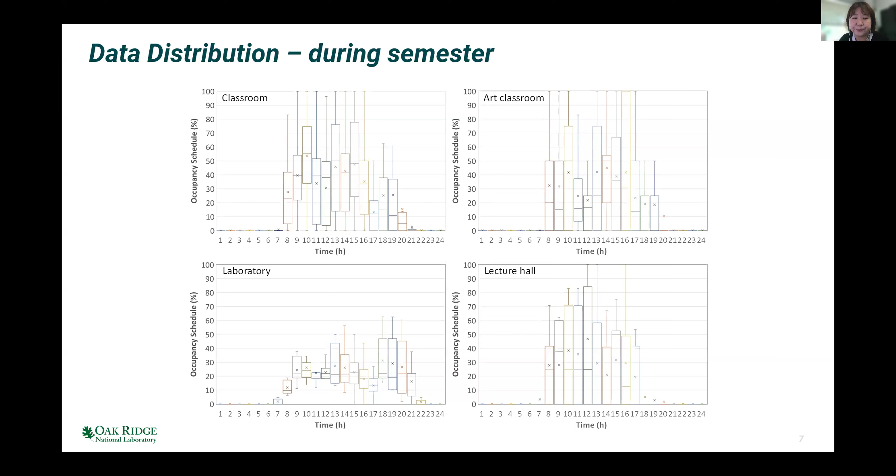Based on all of this data, we generate the occupancy schedule and compare the updated schedule with the previous ones, including the semester schedule and the summer vacation schedule. As you can see, there are significant differences between the updated and previous schedules, especially for classrooms, labs, and art studios. These spaces are not continuously used throughout the day, and occupancy tends to drop sharply during lunch and dinner hours, like the office buildings.

During the semester, the updated classroom schedule shows that fewer than around 50% of the classrooms are occupied at any given time. This is because college classes don't all run at the same time, unlike K-12 schools where schedules are more uniform. In the summer session, usage drops even more. For example, classrooms on the top left are only about 15 to 20% occupied between 8 a.m. to 2 p.m. and below 5% from 3 to 8 p.m.

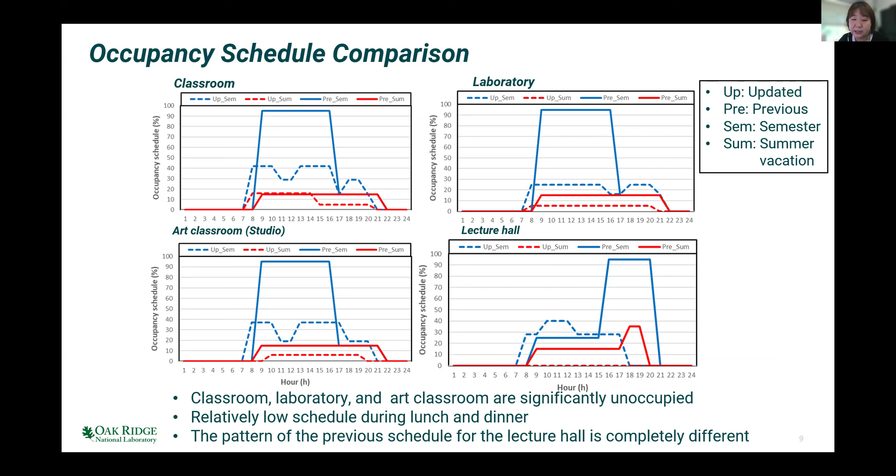As mentioned earlier, the occupancy density in OpenStudio prototype models, including college buildings, was defined based on ASHRAE Standard 62.1. On the left side in this table, you can see the occupancy density values per space type. Classroom and lecture hall have the highest density, around 699 people per 1,000 square meters, whilst spaces like offices or lounges have much lower densities.

On the right side, you can see the differences in occupancy schedules. Previously, only 3 occupancy schedules covered the whole prototype college building model, and only 1 schedule covered all teaching spaces. But in our updated model, based on our collected data, we used 7 occupancy schedules, including updated occupancy schedules of the classroom, laboratory, art classroom, and lecture hall. This allows us to better reflect the distinct usage pattern of each space based on actual reservation data, instead of assuming that all instructional areas operate the same way.

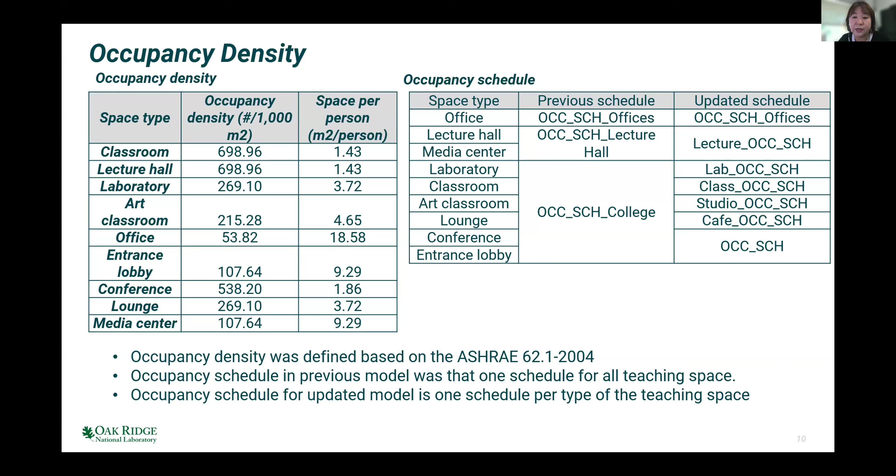This slide shows our comparison of the average number of people in each space type based on the updated versus previous occupancy schedules. As shown on the left side, we see a significant decrease in average occupancy after applying the updated schedules. For example, laboratories decrease around 65%, and art classroom and lecture hall decrease by 40 to 50%. These reductions vary by space type, reflecting more realistic usage patterns captured from actual reservation data.

Because the number of occupants has decreased, the required mechanical ventilation rate also dropped, shown on the right side. In particular, the lecture hall saw the largest changes, with ventilation rates decreased by about 25% to 32%, depending on the version of ASHRAE 90.1. These results suggest that using updated occupancy schedules can lead to more accurate energy modeling.

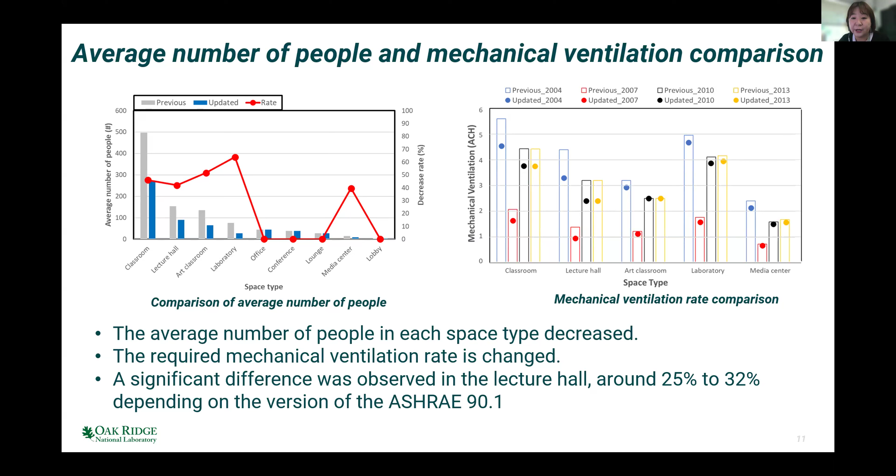To wrap up, the main goal of this study was to develop a more accurate occupancy schedule for the OpenStudio prototype college building based on actual space reservation data collected from US universities. And our research results show that using a generic schedule like those from commercial or school building models tends to oversimplify how space is actually used in colleges. And this can limit the accuracy of simulation or energy modeling.

So as a next step, we plan to expand the data set by collecting more class reservation information from a broader range of universities across the US. And of course, this work was developed specifically for the OpenStudio prototype model, so the current scope is somewhat limited, and further studies will be needed to generalize the findings across different modeling frameworks or building types.

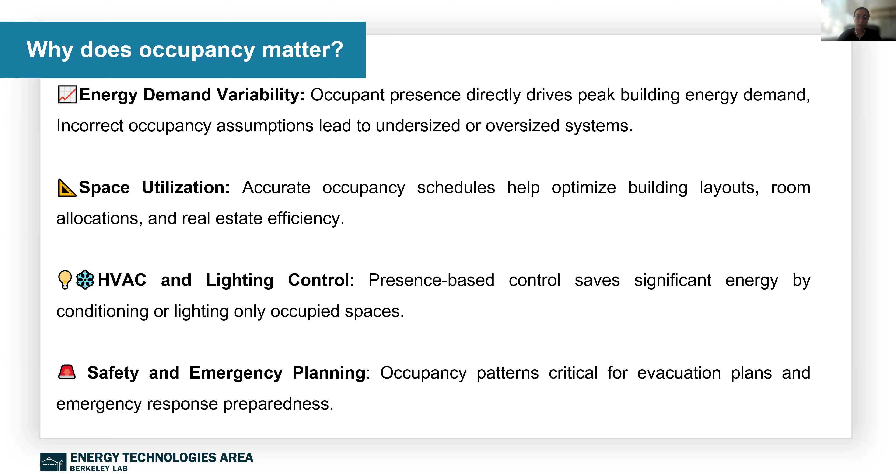Next, I'll come to the different approaches to model occupancy. We know there are several ways we input occupant information, occupant presence, into our building energy models. The simplest and most straightforward way is using a fixed average occupancy. Say we assume that there are 3 people in a household and they are present 24/7 in a home. This is the simplest that we can do. However, with each different use case and objective, we would need different kinds of occupancy modeling approaches.

The second one is schedule-based, which the previous presenter was mentioning, where there are occupant schedules for daily, weekly, and the patterns are predictable, and it's more deterministic. It could be hourly, 15 minutes, and so on. And then the next level is stochastic, which is probabilistic, where we have some variability within the occupant presence, and it's based on statistical distributions, generally Markov chain models or random variability.

And lastly, a higher level of detail, is agent-based or dynamic probabilistic modeling, where we basically model each and every occupant. Each occupant is assumed to be an agent, and they dynamically respond to the environment and other agents around them. This is more like real-time or adaptive occupancy.

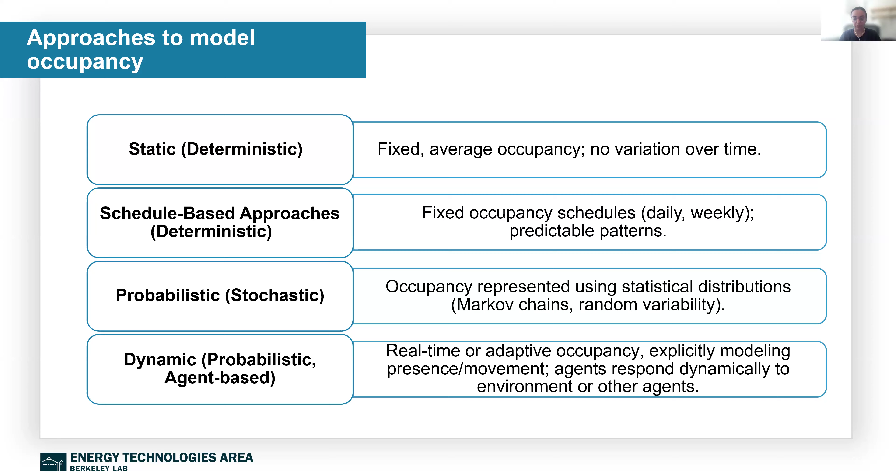So once we have those models, how do these different modeling approaches actually matter within our building energy modeling simulations? Here is a quick example of how deterministic versus stochastic occupant schedules within an office building impact the efficacy of different energy conservation measures. We used a DOE prototype office model, and for the baseline, we used a fixed occupancy. For the second one, we used a stochastic occupant schedule for offices. And for the third one, we simply used the DOE prototype model schedule.

When we simulated these different occupancy approaches and applied some energy conservation measures to the baseline model, we found that just because we were using different types of occupancy assumptions, with the overall occupancy still being the same, there were significant differences in the energy saving potential of different measures. This is for the case of Chicago, but overall we estimated it for 5 different climate zones, and we found that with stochastic schedules the potential of energy conservation measures was in the range of 25 to 41%.

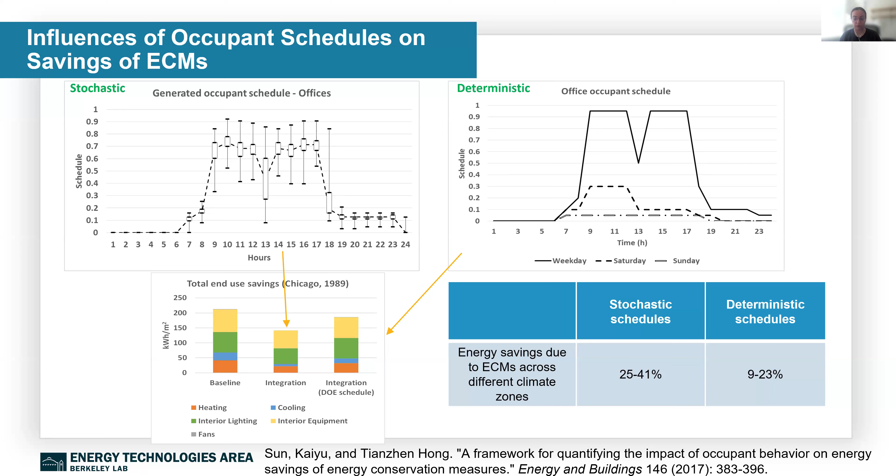So now I come to this concept of level of detail. This level of detail concept is very similar to what we already have in the building information modeling industry, or in the urban scale CityGML approaches of level of detail. However, here what we're trying to achieve is to say that this level of detail concept is broadly applicable for occupant modeling, and occupancy is a part of it, which I'll come to in the next slide.

Level of detail is essentially the degree of detail or granularity used to represent complex human behavior. Human behavior would have elements such as occupant presence and movement, their interactions, how they negotiate, or even simply how they make judgments or decisions. So there are plenty of behavioral aspects that this level of detail concept entails.

And what we say here is that this level of detail is an important concept and framework to help us assess at what level should we be modeling occupants. So for occupancy related level of detail, we could have 3 different dimensions.

The first one is modeling formalism, which I mentioned in the previous slide. The second one is at what spatial scale - is it zone level, building level, or city scale? And then the temporal scale - at what temporal scale do we want to input this occupancy?

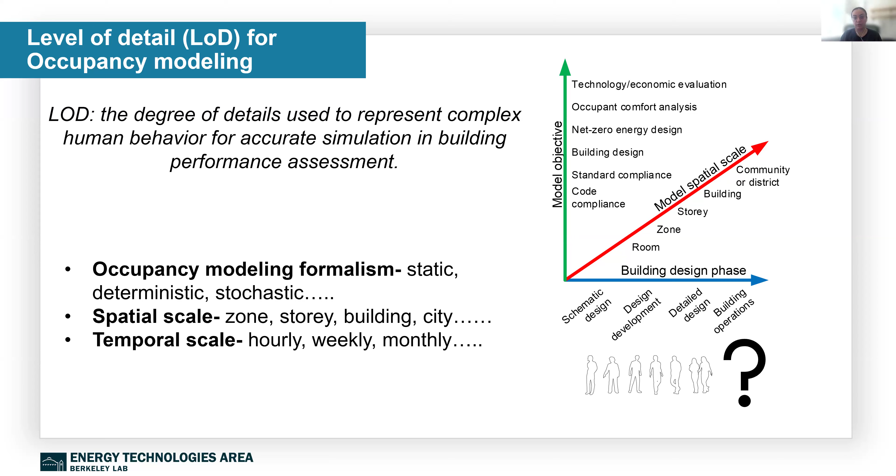I'll come to all these details and nuances in a bit, but before that, I'll introduce this level of detail framework for broader occupant modeling. This framework we developed as part of Annex 79, International Energy Agency's project, where over hundreds of researchers came together to understand how different occupant modeling approaches, case studies, and techniques can be improved. This was part of that project.

Here we have 10 different aspects of occupant modeling. The first 5 are related to model structure, and occupancy is one of them. The next 5 are more related to behavior, like how occupants sense, predict, learn, and others. All these different tiles are actually different levels of detail that we could go into for modeling each of the occupant aspects. For occupancy, these tiles are very similar to what I presented earlier - the static, deterministic, probabilistic, and the agent-based dynamic probabilistic approaches.

And here we say that static is considered LOD0, while the most granular is considered LOD3, the agent-based model. How do we decide upon this? It's basically related to 4 characteristics: what are we trying to achieve in our model, through what performance indicators, at what spatial scale, and what is the building type that we are considering.

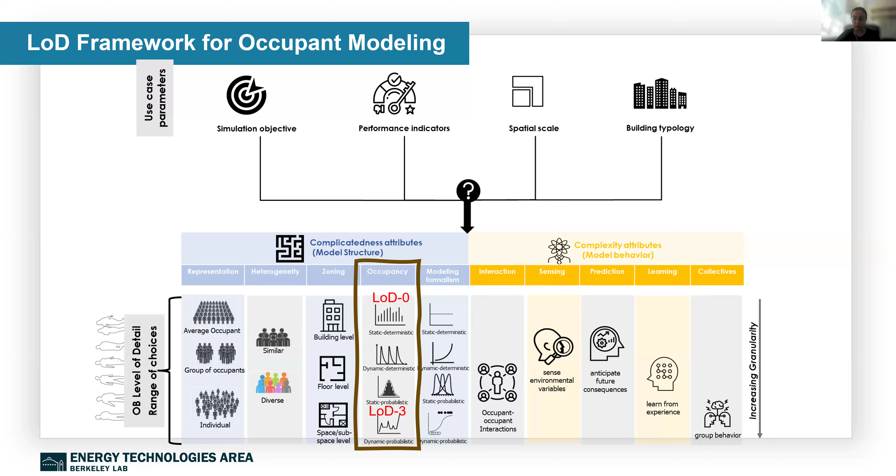For example, if our objective is simply an early design stage analysis, maybe a lower level LOD would be good for comparison. However, if we have a detailed occupant impact analysis, we should have some medium level LOD2 or LOD3 kind of analysis. These levels of detail are only indicative, and they are not comprehensive enough. We could have levels LOD1 to LOD9, depending on what kind of granularity and combinations we want for the different occupancy dimensions related to spatial scale, modeling formalism, or temporal scale.

Then for performance indicators, again, if we are looking at high level performance indicators like annual energy use or energy star score, maybe a coarser LOD would be feasible. While if we are looking at detailed occupant level performance indicators, we would want occupancy that reflects or can connect to those performance indicators, like partial occupancy criteria or occupant hour criteria.

Similarly, for spatial scale, if we are looking at, say, zone level HVAC controls or lighting controls, we would definitely want the occupancy to match at that spatial level instead of modeling occupancy at a building level while doing the analysis at the zone level.

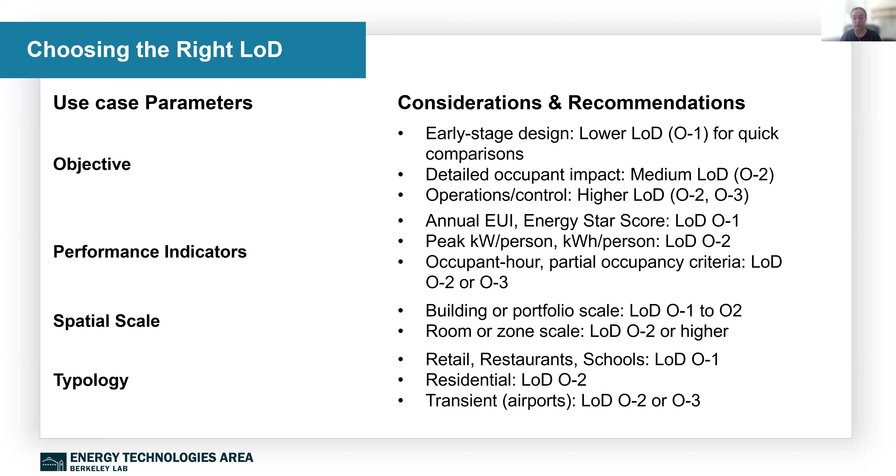Then the next aspect is, how do we model occupancy or occupant behavior in general? We have different energy modeling tools, but do we have enough suite of simulation tools to model those occupant behavior or occupancy? We have this suite of modeling and simulation tools that we've developed at the Berkeley Lab for the past more than a decade.

While some of them are specifically for occupancy, the others are broader for occupant behavior. For example, this drivers, needs, actions, systems - this is just an ontology that represents occupant behavior. And then this ontology paves way for an OBXML schema, which is a standardized XML schema similar to what we have in the BIM for GBXML. And it is

used to represent occupant models. These occupant models could be anything ranging from occupancy models to window opening models to thermostat behavior, anything. And then the fourth one, the occupancy simulator, is specifically an occupancy related tool which is focused on office occupant behavior, office occupancy modeling, where we have this web-based app.

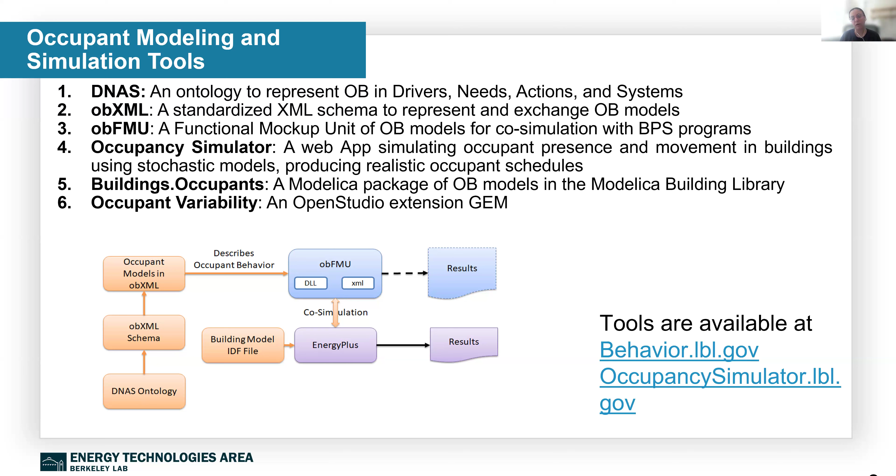You can go to occupancysimulator.lbl.gov and then input some of the parameters that you want for your office building, and it would generate you a realistic occupant schedule using stochastic Markov chain modeling that you could feed to your Energy Plus or other engine building energy model. And then there are also broader models like buildings.occupants, which is a Modelica package, and an OpenStudio gem, which is occupant variability, which has some parts of occupancy, but broader occupant behavior.

And this is just a snapshot of what you could expect in the occupancy simulator, which is hosted at the LBL website. It has a Markov chain process and can give you zone level randomized occupancy for office buildings, which outputs that you feed into the model.

And this has been actually used for a variety of cases within the building performance simulation community. It's been used also by the PNNL Lighting Group, DOE's Hardware in the Loop projects, ARPA-E sensor projects, and obviously the Annex 79 community.

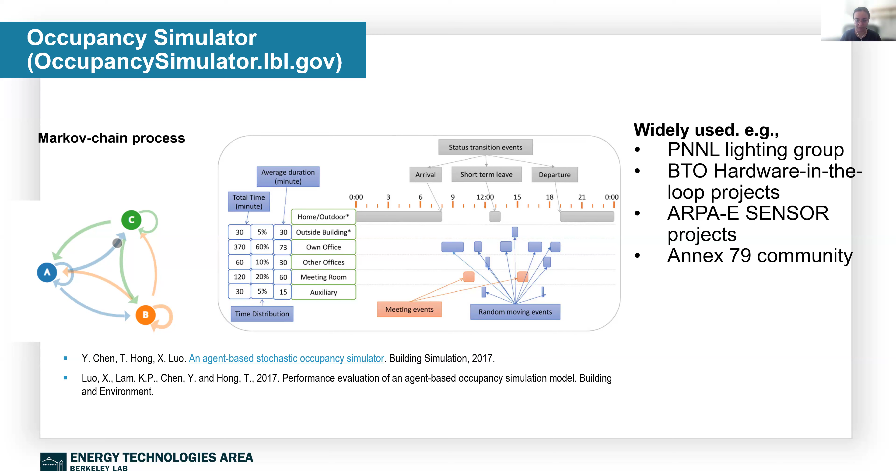So in summary, I would say that no occupancy model or even occupant behavior model is actually perfect. And real-world occupancy patterns are inherently complex and variable, but we have to make sure that our model presents the most realistic or the most accurate occupant assumptions that match our objective or intended purpose. And also this selection of this level of detail is also influenced heavily by what kind of data is available, or what are the computational resources or time or effort that is needed or available for the model development.

And lastly, I'd say that we should follow a parsimonious modeling approach so that we can find a compromise between the data available, different levels of detail, and the computational time, so as to select the most relevant and adequate occupant or occupancy modeling detail. This also requires a lot of judgment, and particularly for new energy modelers or who are not as experienced, they might find it difficult to navigate to what should be the judgment.

I would like to navigate to the ASHRAE Standard 209, which also has a similar level of detail appendix in the recent code cycle for broader modeling. And that could be also a good resource to start with. And yeah, I think this is all I have. Thank you.

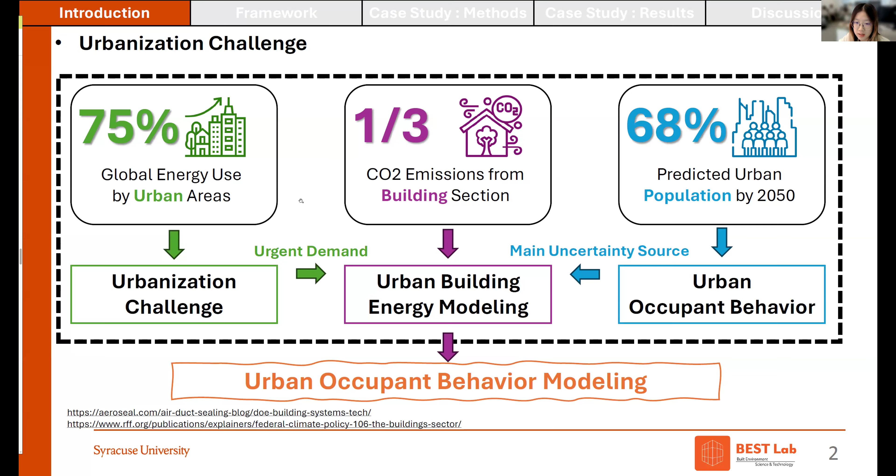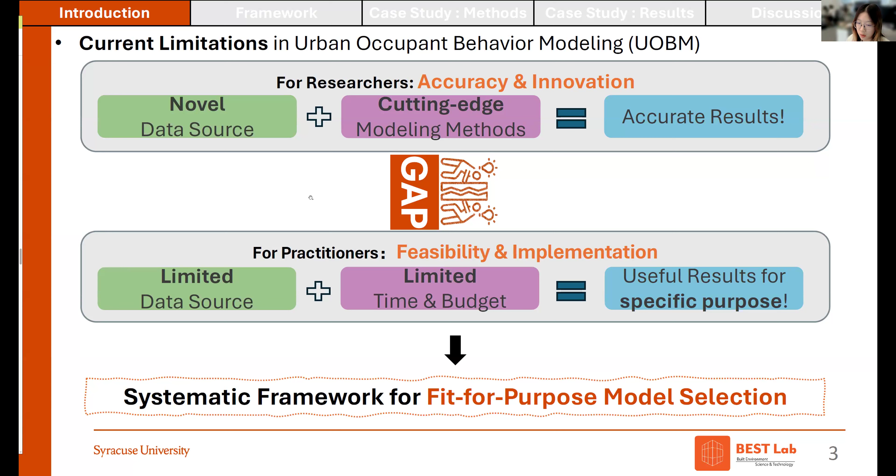So here comes our framework. This framework is mainly built on two main concepts. The first one is, as Jeetika mentioned, the level of detail concept, and the second one is space-based and person-based. The first one, this level of detail, has been introduced, right?

It's introduced by Jeetika to the occupancy behavior field. It can show different representations of objects at various resolutions. And the second one is to show the space-based and person-based approach to distinguish the modeling strategies for different building occupancy modeling. And here comes our three core concepts for our framework.

First is representation, which means what units each model represents, like from average buildings, groups of buildings, individual buildings, to groups of occupants and individual occupants. The second one is heterogeneity, which is the variation in occupant characteristics - maybe the occupants can have similar behaviors or diverse behaviors.

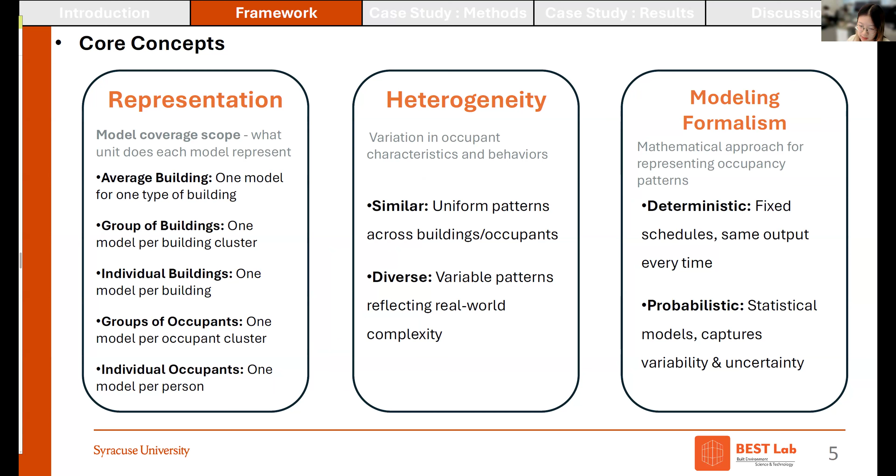And the last one is about modeling formalism - whether it's deterministic fixed schedules or probabilistic statistical models. And according to this, we create our framework with 6 different levels.

The space-based scale is mainly focused on the building. It's space-based - we generate schedules from the building side, like standard deterministic schedules from some standards. S1 means deterministic schedule derived from measured data, like the first presenter did. S2 is probabilistic modeling across building groups. S3 is probabilistic modeling for individual buildings.

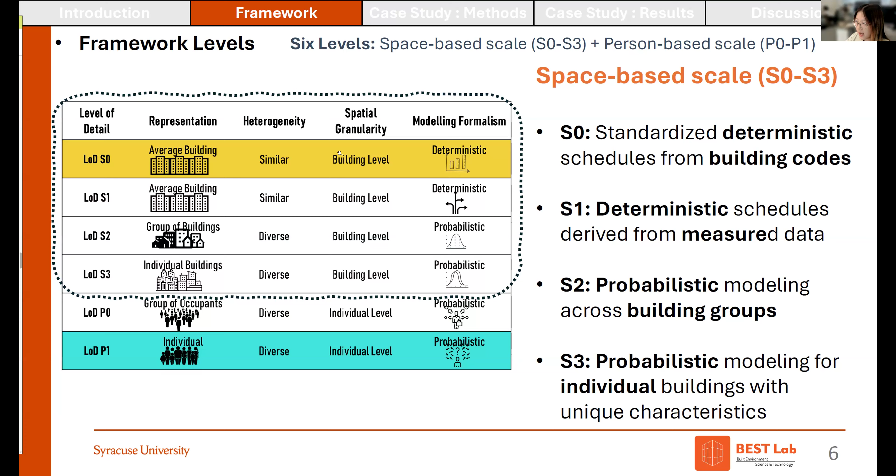And here comes the person-based schedules. This is meaning from human mobility - data is generated from the perspective of the persons. We just model different human behaviors from the person side.

And we can easily do the mapping - we can easily map the data source and modeling methods according to our definitions. Like we have individual level data, and it's surely for the individual level of detail. We can have building level data, which is surely for the space-based LOD.

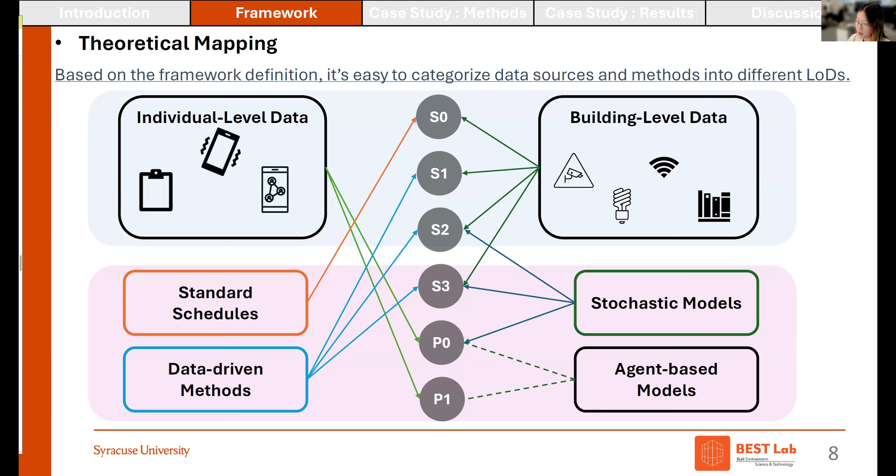But here comes the big question: when we really use it, the same data source can have different levels of detail. The actual LOD depends really on the data coverage and partitioning methods. Even if we have GPS data, for example, covering only about 20% of the population, it has limited representativeness, so it can only be shown as LOD 0. But if we have GPS data covering all the population, it can be shown as LOD 1. So LOD level is not just about data type - it should be data type, coverage, and model method, the combination of both.

So how can we map the different application scenarios to the LODs? Because for the resource constraints and implementation trade-offs and dynamic mappings, we have different choices for different application scenarios. We have to find a way to map this. So we have the two-stage application scenario mapping.

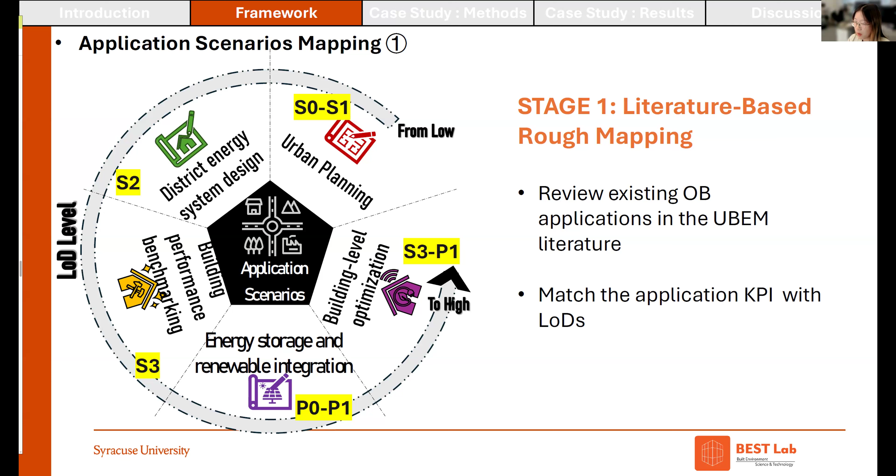The first stage is literature based. We read a lot of papers and found out how people use the different building occupancy modeling methods in different applications. It's a very raw mapping. We can see that for urban planning, we can use S0 or S1, district energy system design or building performance benchmarking, energy storage, renewable integration, building level optimizations. Each of them can use many of the LOD levels, but we want to quantify it. We want to show something real.

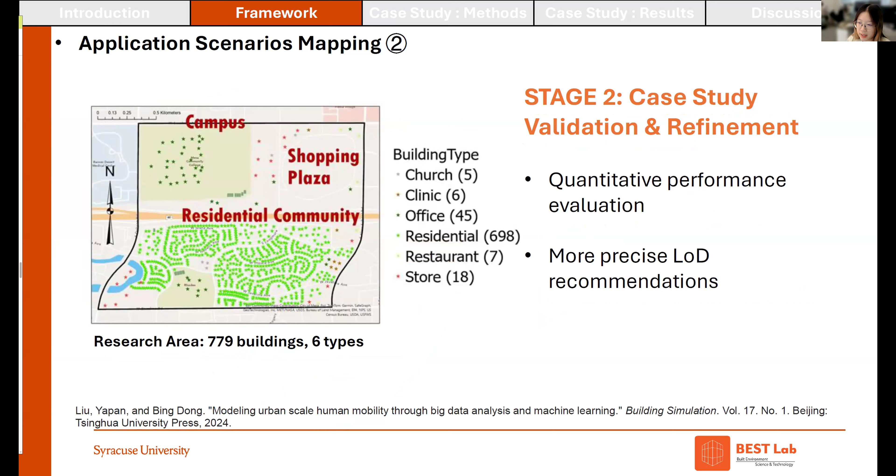So we design a case study to validate our framework. We select a Phoenix neighborhood with about 800 buildings. It includes residential buildings, office buildings, stores, restaurants, clinics, and churches. This diversity lets us test the framework across building types. And our method has 6 steps.

The first step is to generate GPS data which can cover all the population. Because we only have the GPS data, which is 1 month of hourly stay points, containing about 2,000 users in this research area. It just contains about 20% of the population. So we want to use this data to generate something like the ground truth data for this area. So we use the LSTM to do that.

After that, we use the generated real data to do the sampling to get the 2% survey data. And after that, we get the human mobility data. It's human-based. We just know when people will arrive somewhere, maybe they'll leave somewhere. So we use spatial joins to transfer the human mobility data, to transfer their movements to building occupancy schedules.

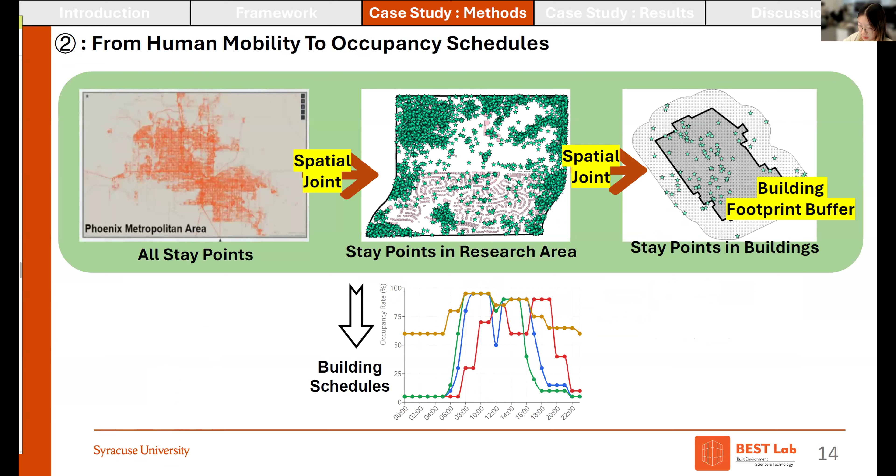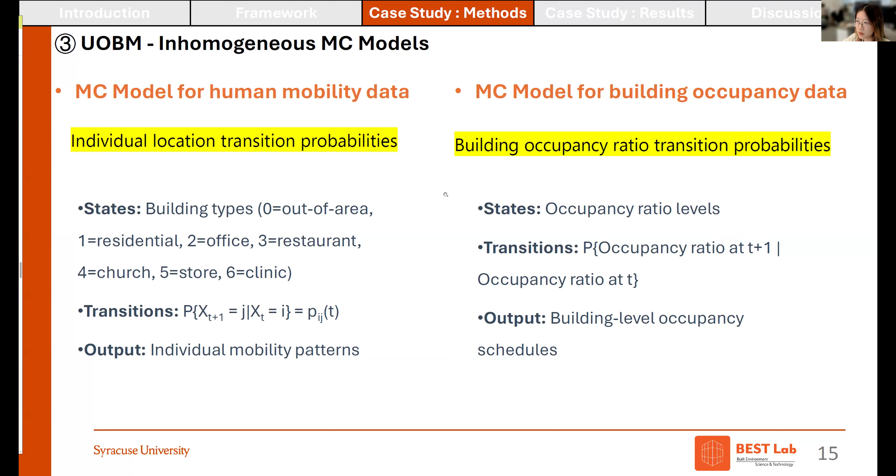And the second part is how we model it. We now have the different data types, right? We want to use them to do the modeling. So we use one method, the inhomogeneous Markov chain model, but for different data. For human mobility data, we use it to calculate the transition probabilities between different locations. And for the building occupancies, we use it to calculate the probability between building occupancy ratios. So by this, we can generate 6 LOD schedule versions for different types of LODs.

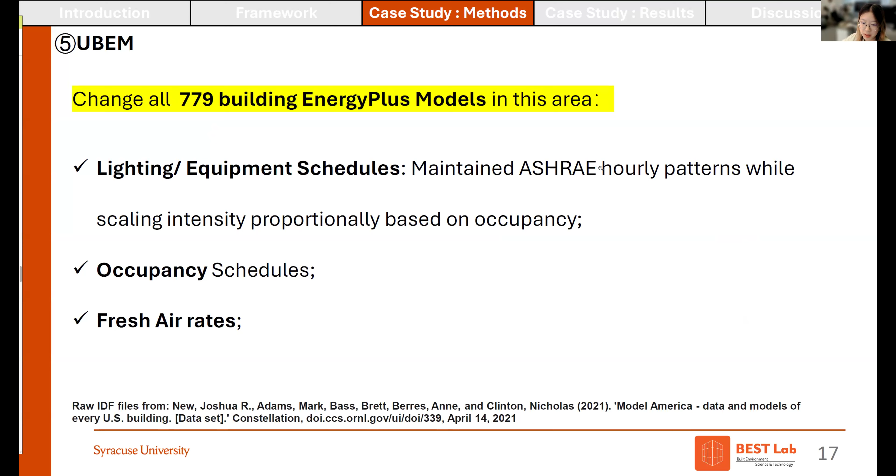And at last, we put the 6 types of generated building occupancy schedules into the 800 building EnergyPlus models in this area. We change the lighting and equipment schedules, the occupancy schedules, and also the fresh air rates accordingly to see the final results. And here's what we use to evaluate the model performance. For the generative model, we typically use metrics like the KL divergence and FID to compare the distributions of the generated data and the real data.

Another is the key performance indicators for different UBEM applications. For district energy planning, we use total energy use. For district energy system design, we use peak energy use. For building performance benchmarking, we use the energy distribution, and we also use the KL statistics to compare the distributions. For energy storage and renewable integration, we use load durations, and for building level optimizations, we use hourly patterns to see the difference.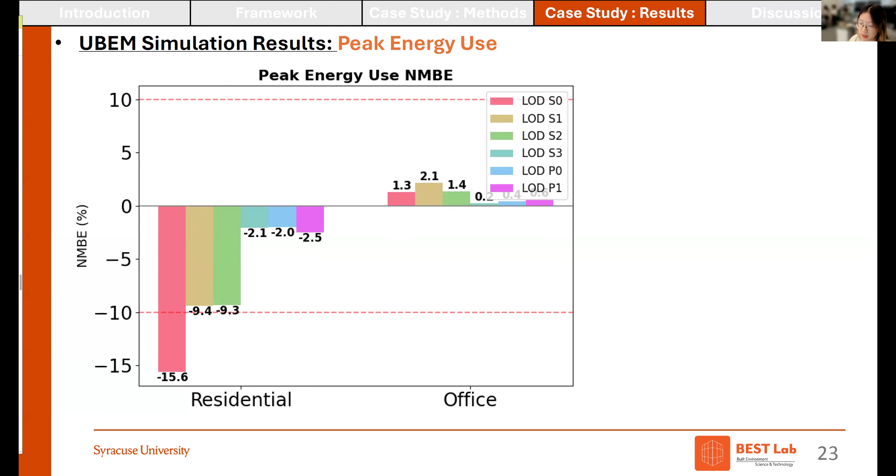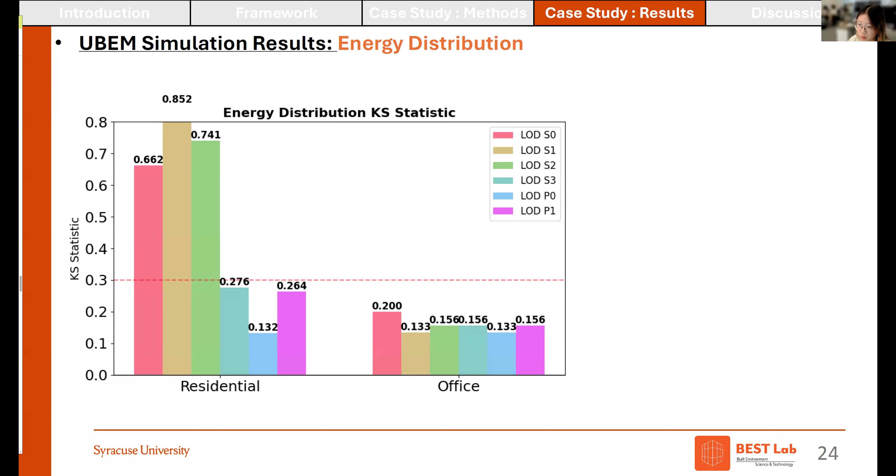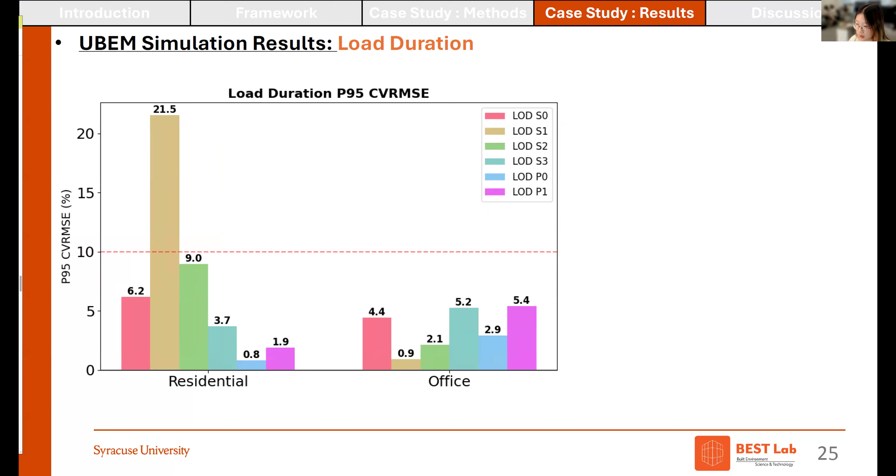And also when it comes to the energy distributions, we can see that S3 and the person-based models like P0, P1 can best capture the variations across different buildings. And for the load durations, we can see that for storage applications, S1 has more than 20% error for residentials, whereas S2 achieved under 10%. So choosing S2 is enough for these applications.

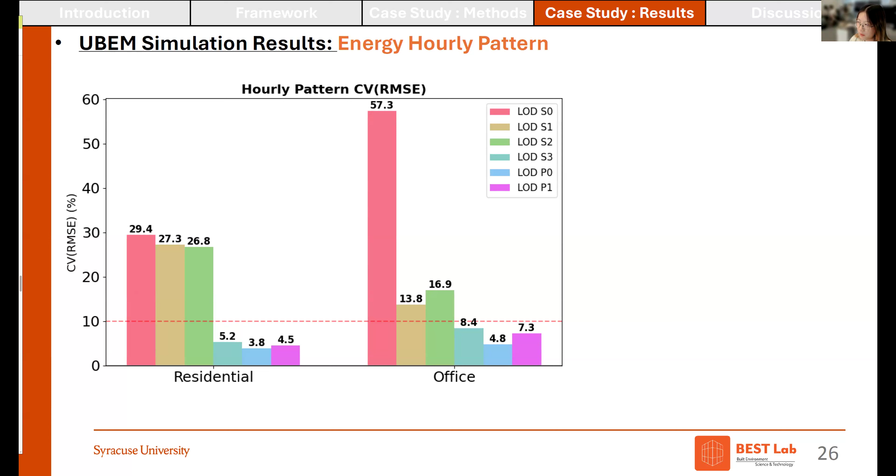And here come the energy hourly patterns. We can also see that if we want to do that, S3 is good enough. And we can also see that the P0 or P1 level can meet all the requirements, but it's too high a level. We don't need that if we just want to use it in the UBEM. It's better to use them maybe in infection risk or transportation, something like that. But if you just want to use it in the UBEM, choosing occupancy modeling from S0 to S3 is good enough.

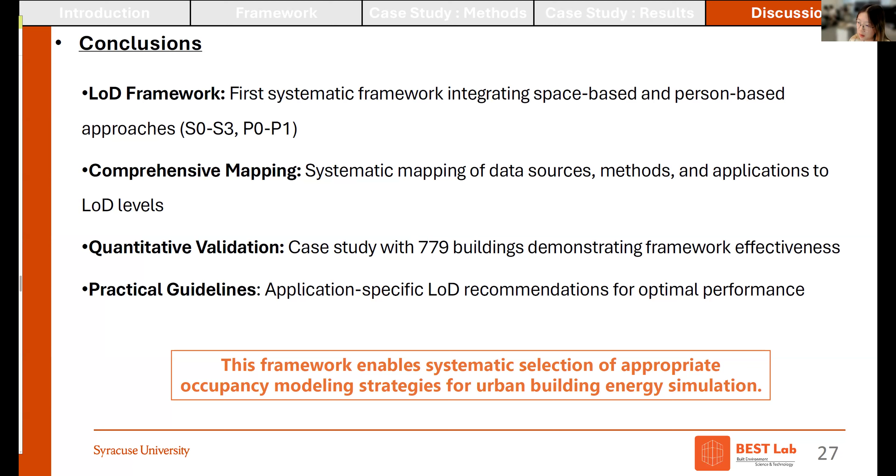And here are the conclusions: we first established the framework for urban occupancy modeling, we mapped the data sources, methods and applications to different levels of detail, and we quantified it and gave some practical guidelines. But there are a lot of limitations, because we don't quantify the data acquisition challenges and the computational cost, and this case study just focuses on one area in Phoenix, Arizona, so we may need diverse urban contexts to do more case studies.

And also, we all know that the relationship between occupancy and building operations is not very simple. More people means a higher cooling load, maybe something like that, but sometimes occupancy doesn't influence the building operations. So that's a big problem. And for these points, we just focus on the maximum impacts from occupancy. I think it's just the maximum impact; it can't represent the real influence on real buildings. So later we'll do more work to reduce the gap.

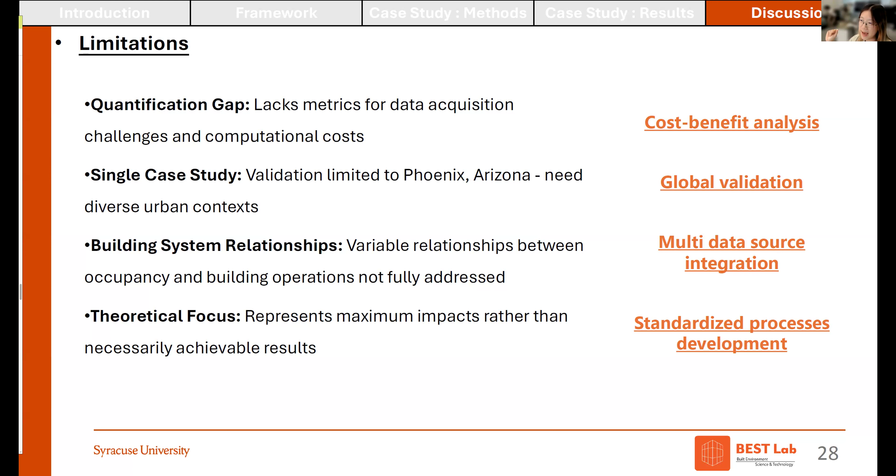So I have one question. If I'm modeling like a college campus, well, that's a bad example, maybe like a military base where there's a known population, it's easier. But in the case of a city where some people might live in one of the buildings but work outside of the study area, or the reverse, work there but not live there, how do we deal with that boundary condition of people who might leave the study area?

Yes, that's a good question. When we process the data, we give each location a label. If someone is out of this area, the label is 0. So when we generate the data, it's just 0. It's a unique label for the leaving people, something like that. Okay, thanks. That's great.

Any other questions? I actually have one question. I understand this is more focused on the urban level, so the accuracy might not really be focused on one building type, but I'm curious about the GPS technologies. How accurately does GPS detect not only the presence of people but also their exact location inside the building? Is it possible to detect that granularity with GPS within the building?